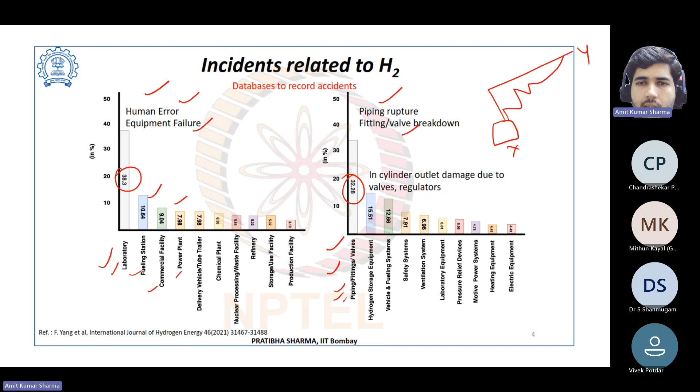Also, if we see the reason, maximum incidents are due to piping, fitting, and valves - either piping rupture, fitting failure, or valve breakdown. Almost 32% of incidents are due to this only, because hydrogen is a very light gas, and you have various kinds of valves, pipings, and fittings. Suppose your experimental setup is at location X and the storage is at location Y. From X to Y you have piping, and due to location and space constraints, this pipe may be zigzag type or have many connection fittings. So there are many points where leakage can happen - either valve breakdown, fitting breakdown, or piping rupture. Most incidents are due to this only.

Other reasons include hydrogen storage equipment and cylinder outlet damage due to valves and regulators - almost 12.66% in vehicles and fueling stations - then safety systems, ventilation systems, and so on. So these are the data regarding incidents related to hydrogen.

So there's an element of risk. The acceptable level of safety is represented by R equals P multiplied by C - probability multiplied by the consequences due to the incident, also the cost associated.

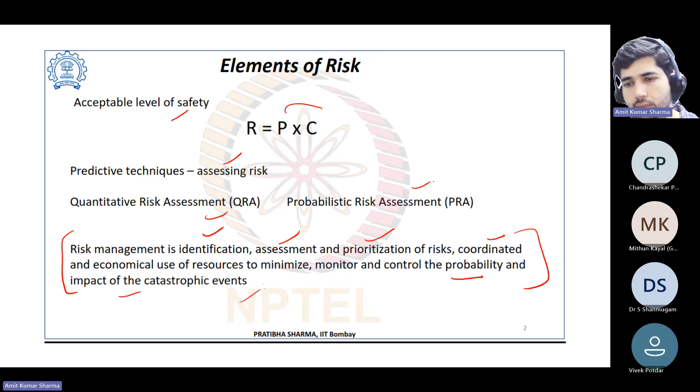So here we have predictive techniques. We can assess the risk using quantitative risk assessment (QRA) and probabilistic risk assessment (PRA). Risk management is the identification, assessment, and prioritization of risks, and the coordinated and economical use of resources to minimize, monitor, and control the probability and impact of catastrophic events. Because we are handling hydrogen, we need to consider all aspects of risk management - identification, assessment, prioritization of risk, and coordinated economical use of resources to minimize, monitor, and control the probability and impact of catastrophic events. These are the important elements for risk management.

In the past, there have been some incidents - the Hindenburg disaster. On 6 May 1937 in New Jersey, there was a fire with explosion, killing 36 people. The outer shell and paint of the airship was flammable and could have been ignited; electrical spark or electrostatic discharge was also a possible cause.

Due to this, the use of hydrogen was very limited. But later studies on this incident showed that maybe the fire was due to the outer shell and paint of the airship being flammable, not only due to hydrogen, but also due to electrostatic discharge. So there can be many reasons for the initial ignition that caused this incident.

Then the hydrogen vapor cloud explosion on 23 October 1989 at the Houston polyethylene plant. There was extensive damage, 22 lives lost and 100 injuries.

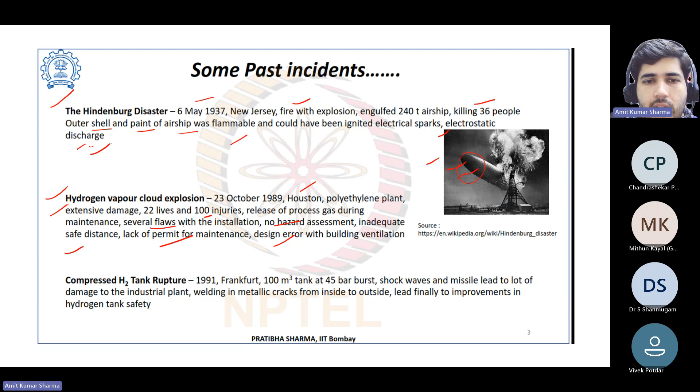In this release of process gas during maintenance, several flaws with the installation were recorded: no hazard assessment, inadequate safe distance, lack of permit for maintenance, and design error with building ventilation. So these were the reasons for this incident.

Then the compressed hydrogen tank rupture in 1991 in Frankfurt. An almost 100 cubic meter tank at 45 bar burst. Due to this, the shock wave and missile effects led to a lot of damage to the industrial plant, with welding and metallic cracks from inside to outside region, finally leading to improvements in hydrogen tank safety.

After this incident, there were major improvements in compressed hydrogen tanks. We have covered in our previous classes type 1, type 2, type 3, and type 4 kinds of tanks.

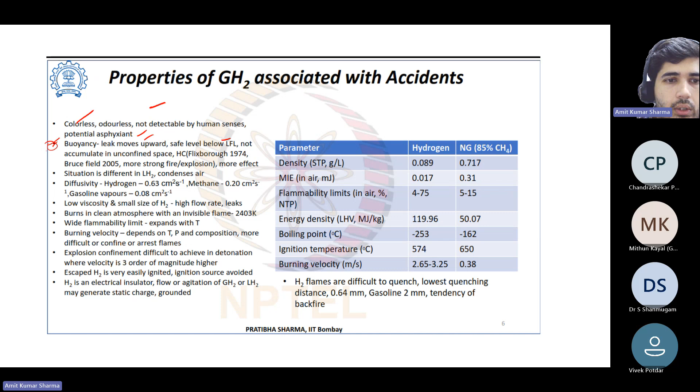As compared to hydrocarbons, hydrogen is more buoyant. In the Flixborough 1974 and Buncefield 2005 incidents, there were stronger fires and explosions due to hydrocarbons.

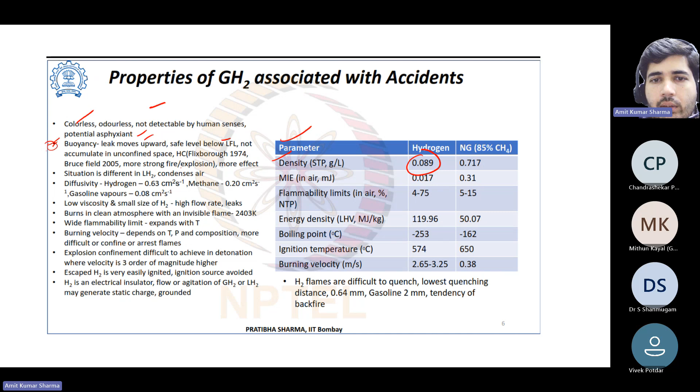If you compare the parameters, the density at STP for hydrogen is 0.089, for natural gas 0.717. The minimum ignition energy in air, in millijoules, is only 0.017 for hydrogen, compared to 0.31 for natural gas. So it's very low. The flammability limit is 4 to 75%.

If you are having liquid hydrogen, the situation is different because in that case the density is higher. The diffusivity of hydrogen is also very good, 0.63 centimeter square per second, as compared to methane at only 0.20. So it's also a good property.

If you are having hydrogen leakage, it will diffuse very fast, so in case of unconfined space, the chances of explosion are less. Low viscosity and small molecular size of hydrogen lead to high flow rate and leaks, and it burns in a clean atmosphere with an invisible flame.

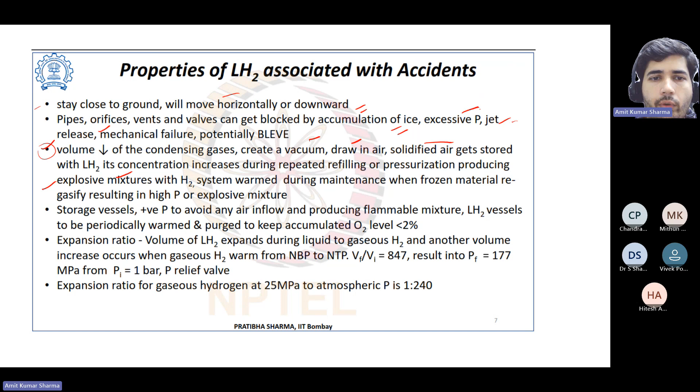To avoid this, the system must be warmed during maintenance when frozen material regasifies, resulting in high pressure or explosive mixture. The storage vessel should maintain positive pressure to avoid air inflow and producing flammable mixture. Liquid hydrogen vessels should be periodically warmed and purged to keep accumulated oxygen level less than 2%.

If we talk about the expansion ratio, since we are converting gaseous hydrogen into liquid hydrogen, there is a huge volume change. Volume of liquid hydrogen expands during liquid to gaseous transition, and another volume increase occurs when gaseous hydrogen warms from NBP to NTP. The final volume is 847 times the initial volume, and the final pressure is 177 megapascal. Due to this, there should always be a relief valve to release this high pressure. The expansion ratio of gaseous hydrogen at 25 megapascal to atmospheric pressure is 1 to 240.

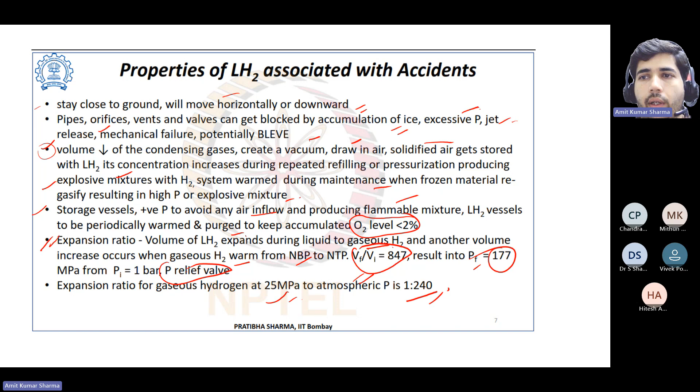Hydrogen embrittlement is also a measure - we covered this in our previous classes. It's a major issue; it can deteriorate the mechanical properties of metal, so selection of appropriate metal is an important part of hydrogen safety. The material chosen for the vessel and storage should have no embrittlement. The material should be metallurgically stable - phase change in the crystalline structure should not occur with time or repeated thermal cycling.

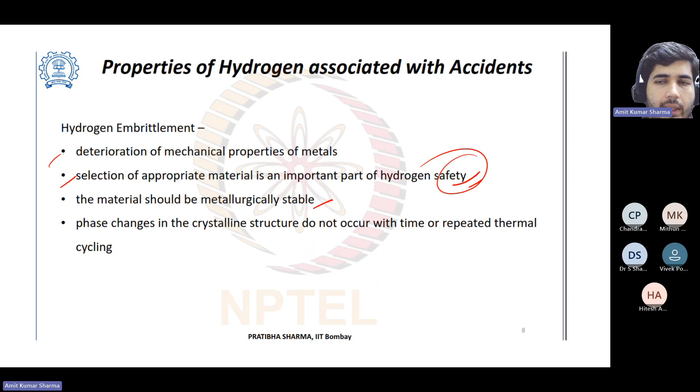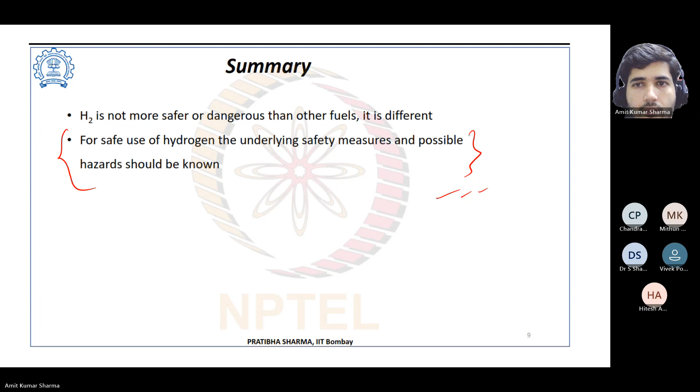Which among the following is a physiological hydrogen hazard: vapor cloud explosion, embrittlement, fire, or asphyxiation? The answer is asphyxiation, option D.

Types of hydrogen hazards are divided into three categories: physiological, physical and chemical. Physiological includes asphyxiation, overpressure, thermal burns and cryogenic burns. Physical includes embrittlement, environmental, internal and hydrogen reactions. Chemical includes rupture, explosion, fire, and vapor cloud explosion.

What is the meaning of asphyxiation? Asphyxiation is basically when hydrogen replaces oxygen, and when more than 95% of the oxygen is replaced, there is a problem of breathing - oxygen deficiency occurs. If you're in a confined space with no ventilation, hydrogen can displace the oxygen, and the concentration of oxygen will decrease, resulting in the case of asphyxiation.

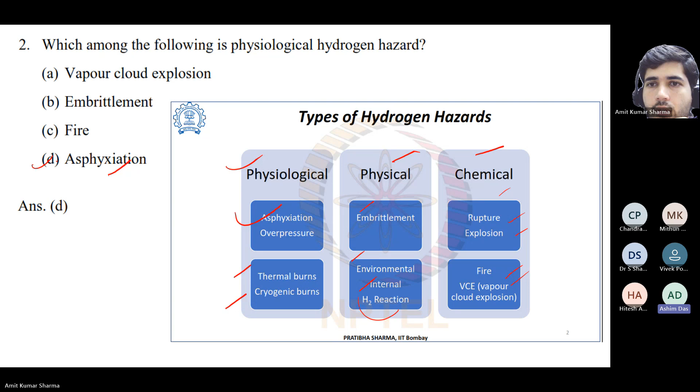There are some important terms. Explosion: if there is a rapid release of hydrogen and ignition occurs, there will be rapid release and pressure rise. Deflagration: flame front moves through a flammable mixture in the form of a subsonic wave with respect to the unburned mixture. Detonation: flame front coupled to a shock wave propagates through a detonable mixture in the form of a supersonic wave with respect to the unburned mixture - it propagates 1,000 times faster than deflagration. In BLEVE, there is sudden release of a large mass of pressurized liquid into the atmosphere; if flammable, it ignites forming a nearly spherical burning cloud or fireball. UVCE and CVCE are confined or unconfined vapor cloud explosions. Flash fire occurs with very dilute or very concentrated fuel mixture, but within flammability limits - flame travels in the cloud at low speed with very little pressure increase.

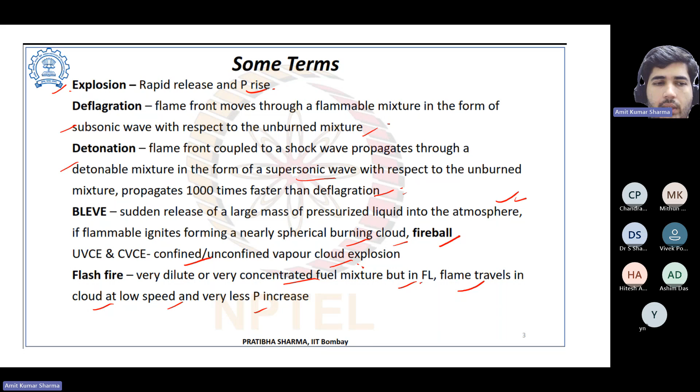These are some important definitions. Which among the following is not related to material properties causing hydrogen hazards: liner blistering, damage of carbon, fire, boiling liquid expanding vapor explosion (BLEVE), or embrittlement?

It's damage of carbon fiber, option B. I think it will be fiber, na? Instead of fire. Yes, fiber. Damage of carbon fiber.

So anybody else? We have one answer. It is boiling liquid expansion and vapor explosion. Okay, we have another answer, a different one.

So let's once again go through the question. The question is about which among the following is not related to the material properties causing hydrogen hazards. So it should be not connected with the material.

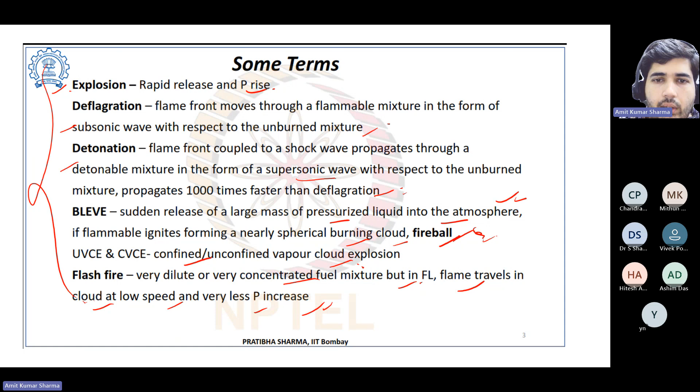Embrittlement, we know, is a metal property, then also the blistering and also the damage of carbon fiber. So correct answer is option C.

So if you go through the cause of hazards, then it's due to material properties related or handling system related. Under material properties related, here comes liner blistering in the pressure vessel, hydrogen permeation, embrittlement, damage to carbon fibers, resistance to fire and high temperature, and property changes at lower temperature. So these things come under material properties.

And if you see the handling aspect, then BLEVE, boiling liquid expanding vapor explosion, then gas hydrogen leakage, liquid hydrogen release, hydrogen jet fire, temperature variation, thermal radiation, delayed ignition, and explosion. So these are the two major causes of hazard connected with the handling system or material properties related system.

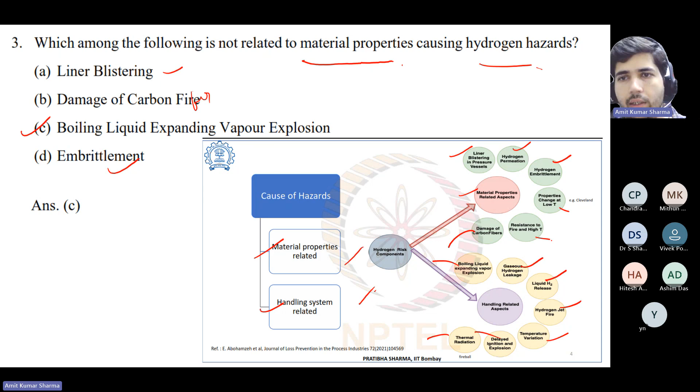If you see gaseous hydrogen hazards, then the release is connected with immediate ignition, delayed ignition, or rupture of vessel. So release can be due to three reasons: immediate ignition, delayed ignition, or after release there can be rupture of vessel. These happen if there is a hydrogen air flammable mixture and an ignition source.

So, factors to assess the appropriate consequences: the characteristics of release like pressure - when there is a release, what is the pressure, low or high; then the size, buoyancy driven or not; then the space, confined or unconfined; then the source, any potential ignition source present or not; then the ignition, immediate or delayed; then external aggression - not release, but external aggression like thermal, mechanical, or storage vessel rupture or burst. These are the factors you need to assess appropriately.

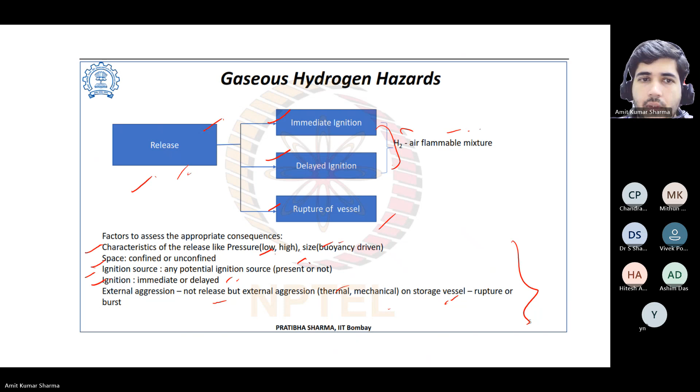Anybody? Jet fire means there is a continuous small jet fire, and flash fire means once fire is done, then it got extinguished.

Okay, anybody else? Jet fire means suddenly pressurized gas will release, and if there is any fire, due to high pressure and density, all of the gas will not catch fire, so it will propagate along with the fire - that is jet fire. Flash fire is when a vapor makes a gaseous mixture with sufficient oxygen, high volume, and there is fire - that is flash fire.

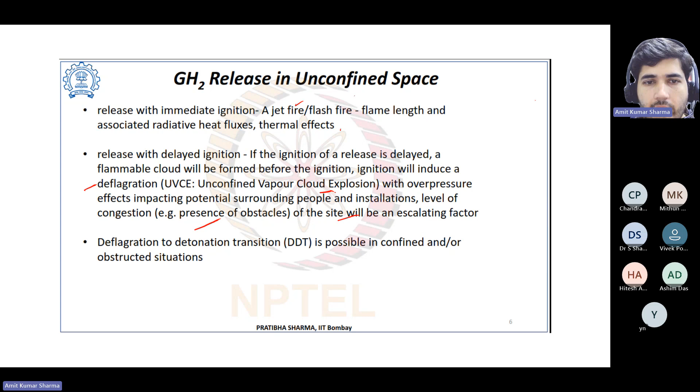Level of congestion, like the presence of obstacles on the site, will be an escalating factor. Deflagration to detonation transition is possible in confined and/or obstructed situations.

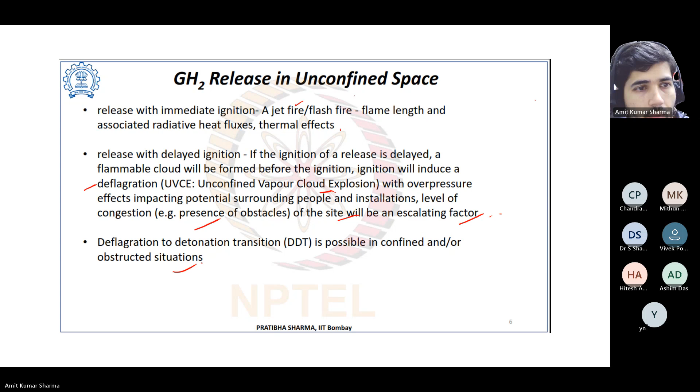If we have a confined space and there is a release of gaseous hydrogen, a confined space can be more concerning, or a container hosting a process, hydrogen storage, garages, parking, tunnels, accumulation.

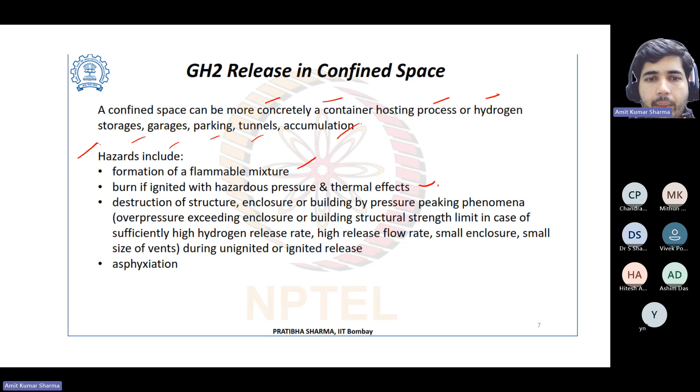The hazards that can be included are formation of a flammable mixture, burn if ignited with hazardous pressure, and thermal effects. Also destruction of structure, enclosure, or building by pressure peaking phenomena, or pressure exceeding the enclosure or building structure strength.

This occurs in case of sufficiently high hydrogen release rate, high release flow rate, small enclosure, small size of vents, during unignited or ignited release.

And asphyxiation due to the displacement of oxygen. Then the hydrogen buildup: hydrogen release in a confined space will accumulate according to ventilation rate, and concentration level and distribution will differ.

It depends on the ventilation. If there is no ventilation, hydrogen concentration will depend on the release duration. A long duration release can reach up to 100%. Natural ventilation is driven by the buoyancy effect.

This is a way of mitigating hydrogen buildup in case of accidental release in confined spaces. Mechanical ventilation is driven by fans or other mechanical devices, limiting hydrogen concentration inside a confined space, used when natural ventilation is not possible or not sufficient to reach safety targets.

Venting panels can be set up on the roof of the container. Flames are directed upwards, aerial overpressure at ground level is very limited, and container deformation is limited. Efficient mitigation means limiting the effect of an explosion in a confined space, so these are the things we can do.

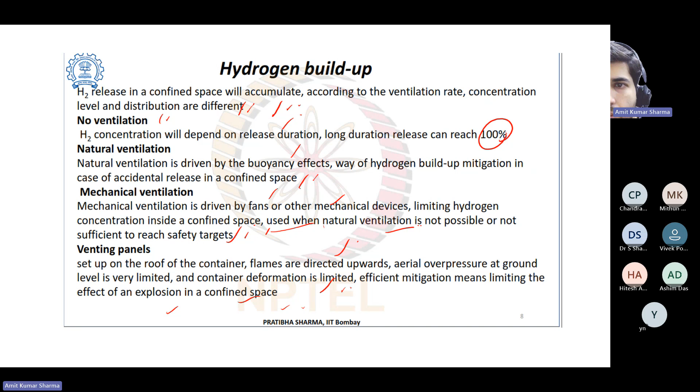If there is a burst of a pressurized vessel, it is a physical explosion with rapid expansion, generating an overpressure wave in addition to fragments. It can occur at normal operating pressure, working pressure, due to degradation over time of the pressurized volume: corrosion, fatigue, embrittlement. These are the reasons for this.

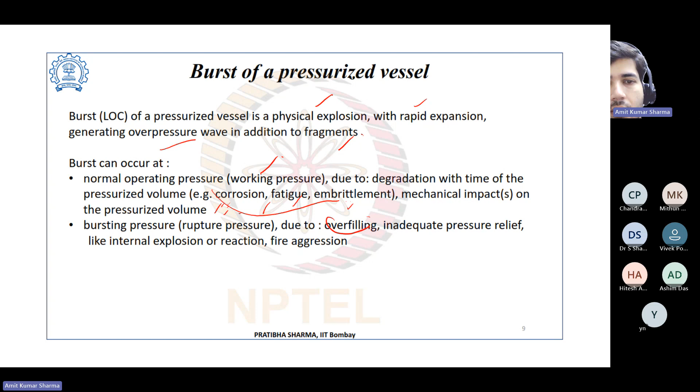Also the mechanical impact on the pressurized volume, and bursting pressure due to overfilling beyond the limit. Then inadequate pressure relief, if there is no pressure relief, can lead to internal explosion or reaction and fire aggression.

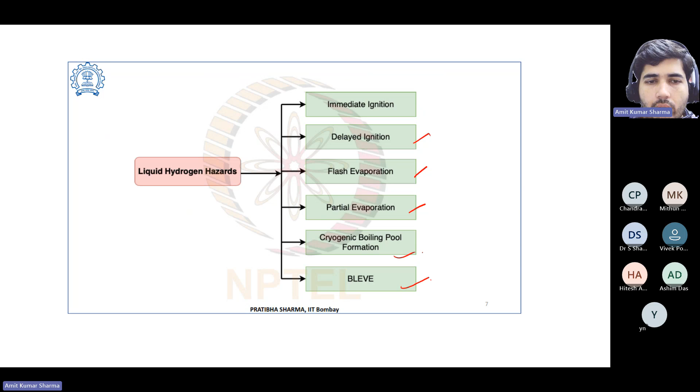Liquid hydrogen hazards are immediate ignition, delayed ignition, flash evaporation, partial evaporation, BLEVE, and cryogenic boiling pool formation. Immediate ignition results in a high pressure jet or overpressure effect due to ignition. Delayed ignition: flow horizontally or downwards after immediate release of liquid hydrogen, condensation of atmospheric humidity making it visible and more dense.

Because its temperature is very low, atmospheric humidity will condense, giving a high expansion ratio larger than the cloud induced by gaseous hydrogen release. We have seen that the expansion ratio is very high, almost 800 times.

Intensity and distance of effect depend on the pressure or release diameter; there can be a jet, a rainout phenomenon, formation of hydrogen droplets falling on the ground and inducing a hydrogen pool can be observed.

The cryogenic hydrogen pool vaporization: a hydrogen liquid spillage can induce a pool. Liquid hydrogen will vaporize and form a flammable cloud with significant volume, and wind conditions have a significant impact on the propagation and dispersion of the cloud.

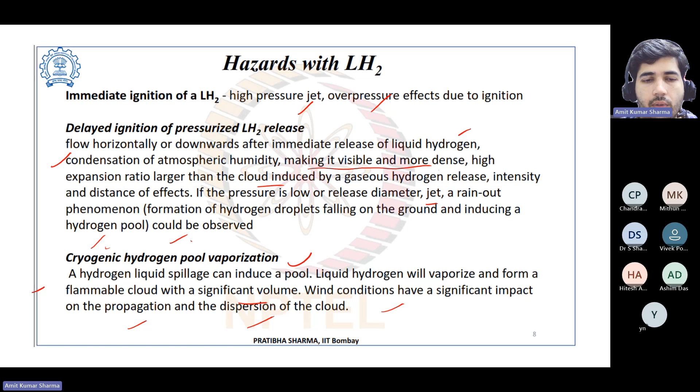And the UVCE: a cold reactive hydrogen-air cloud formed, ignited, and the flame could interact with obstacles, vaporizer, pipe break, vegetation, possibly leading to flame acceleration and even to a deflagration to detonation transition in the worst case scenario.

About BLEVE: liquid which is stored at temperature above its saturation temperature at atmospheric pressure, some of the liquid will flash to vapor, resulting in the generation of overpressure. Ignition of the released contents produces a large fireball, which can determine the hazard range, so there will be a large fireball at the source - that is a BLEVE.

Normally liquid hydrogen vessels have pressure relief valves. Failure or blockage of the system could lead to a BLEVE, or fire attack could raise pressure and lead to a BLEVE with fireball due to inadequate venting of pressure. It's very important to have a pressure relief valve.

Which phenomena among the following will occur on immediate ignition of gaseous hydrogen released in unconfined space? Unconfined vapor cloud explosion, BLEVE, jet fire, or cryogenic pool formation.

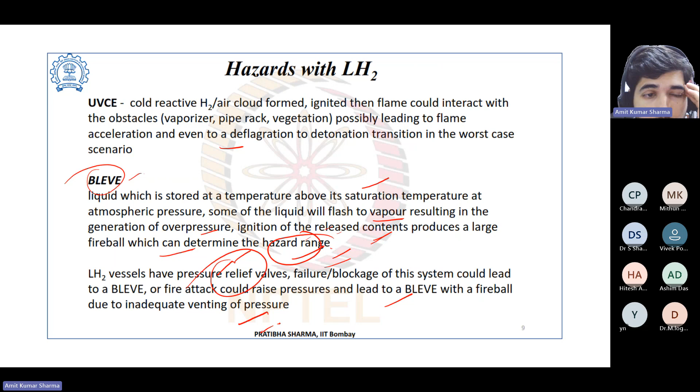Which among the following is an advanced quantitative risk assessment model? Event tree, discrete dynamic event tree, fault tree, parts count. So which among these is the advanced quantitative risk assessment model? Dynamic event tree. So we have one answer, option B, discrete dynamic event tree.

So correct answer is option B, discrete dynamic event tree. So event tree, fault tree and parts count are conventional, or you can say the old quantitative risk assessment models, and the advanced one is the discrete dynamic event tree.

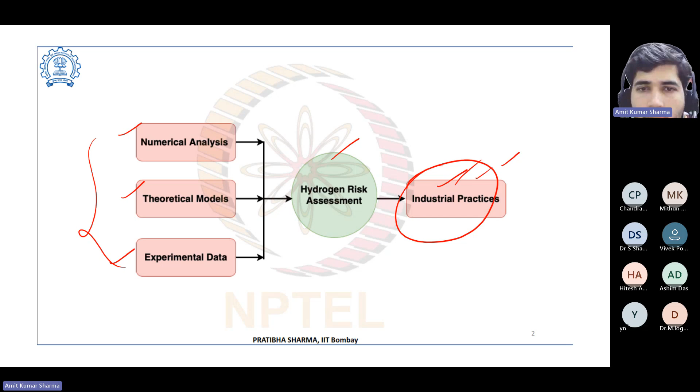So for hydrogen risk assessment, we can have numerical analysis, theoretical models, and experimental data. Based on these, we can do the hydrogen risk assessment, and we can also follow industrial practices. So it's good because we know that industries are using hydrogen for a long time, so these practices are very important.

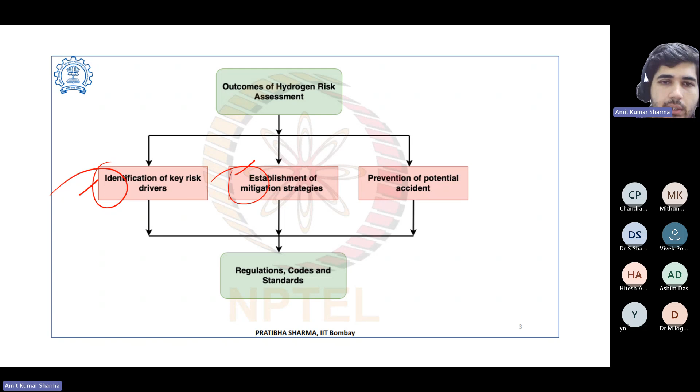So the outcomes of hydrogen risk assessment are identification of key risk drivers. So what are the points, factors, parameters that are the drivers for the risk. And the establishment of mitigation strategy, you need to come up with a strategy to mitigate the risk, and the prevention of potential accident. So these three points you need to consider under hydrogen risk assessment.

By combining these three, we come up with regulation, codes, and standards. Based on these three, we have some regulations, codes, and standards that we have to follow so that we can avoid any accident.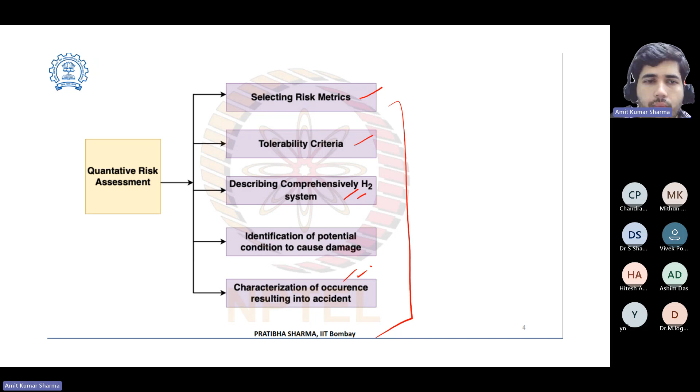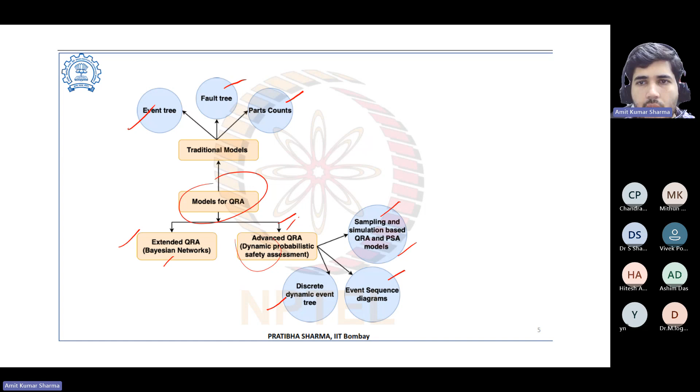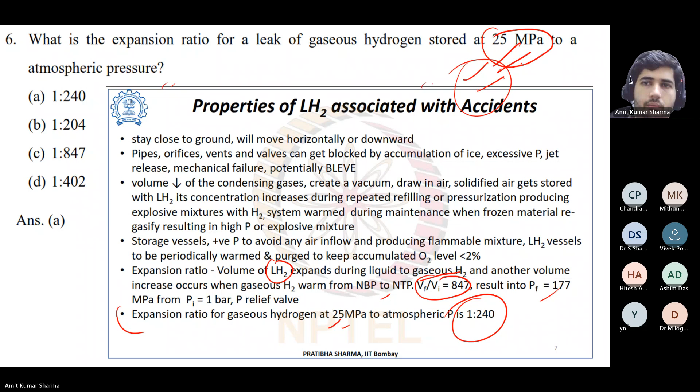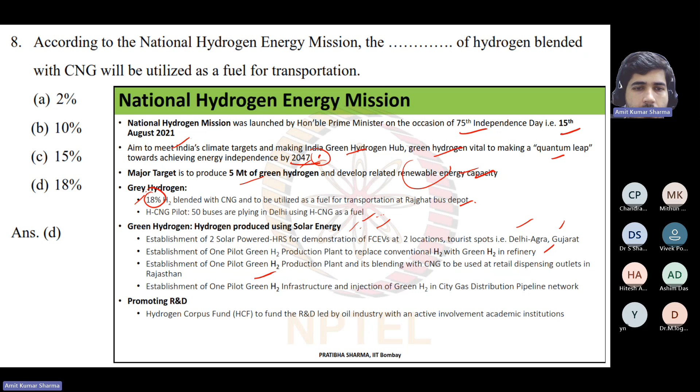Then establishment of one pilot green hydrogen infrastructure and injection of green hydrogen in city gas distribution pipeline network. Then promoting R&D - Hydrogen Corpus Fund (HCF) to fund the R&D led by oil industry with active involvement of academic institutions. So now we have National Green Hydrogen Mission. First it was National Hydrogen Energy Mission, so under this now we have NGHM.

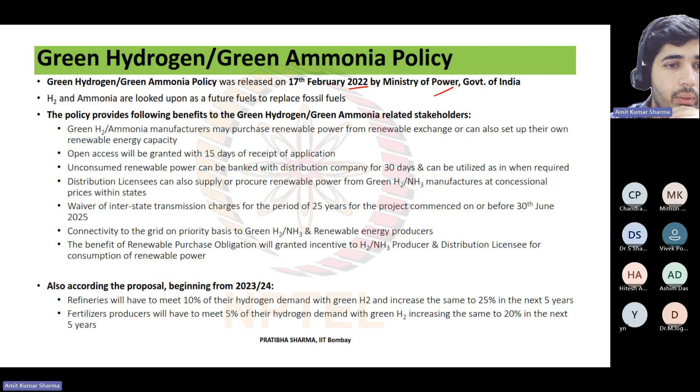There's a green hydrogen, green ammonia policy released on 17th February 2022 by Ministry of Power, Government of India. So hydrogen and ammonia are looked upon as future fuels to replace fossil fuel. The policy provides benefits to green hydrogen, green ammonia related stakeholders. First, the green hydrogen ammonia manufacturers may purchase renewable power from renewable exchange or can also set up their own renewable energy capacity. So where do we use ammonia?

Fertilizer, yeah, in fertilizer. Then methanol generation, yeah. So what is green ammonia? Where the source of hydrogen would be from renewables. Yes, using the hydrogen - fossil is used for ammonia generation normally, but if we use green hydrogen and make ammonia, then that's green ammonia.

So open access will be granted within 15 days of receipt of the application. Then the unconsumed renewable power can be banked with distribution company for 30 days. So there are some details about the policies.

Also according to the proposal, beginning from 2023 and 2024, refineries will have to meet 10% of their hydrogen demand with green hydrogen and increase the same to 25% in the next 5 years. Then the fertilizer producer will have to meet 5% of their hydrogen demand with green hydrogen, increasing the same to 20% in the next 5 years. So these are the targets.

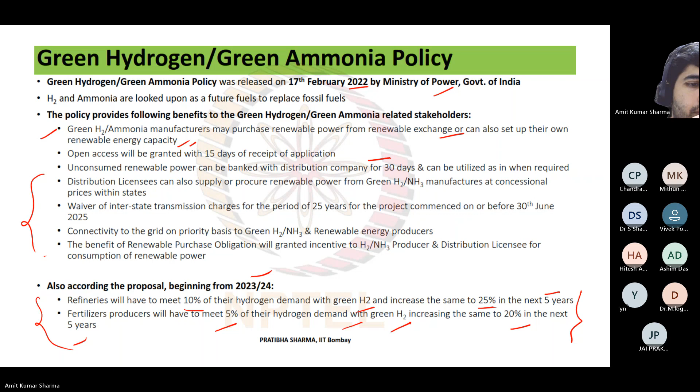So how much percentage of refineries' present hydrogen demand is supposed to be met with green hydrogen as per the green hydrogen, green ammonia policy of Government of India? It's 10%. Yes, so we have covered here - they have to meet 10% of their hydrogen demand with green hydrogen. So the answer is A, 10%.

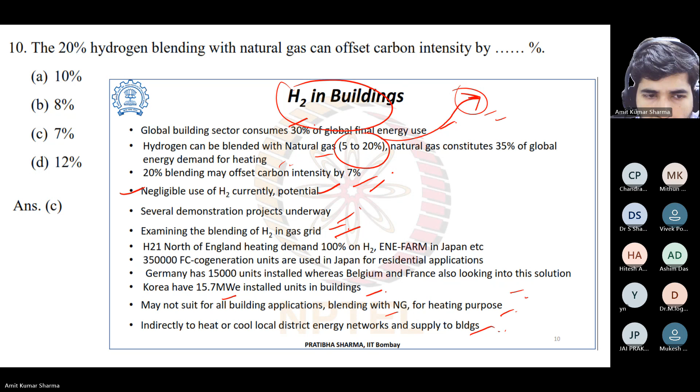Korea has 15.7 megawatts of electric installed in buildings, so there's a huge potential for hydrogen. It may not suit all building applications, but blending with natural gas for heating purposes is possible, indirectly heating or cooling local district energy networks and supplying buildings. So hydrogen has a huge market in buildings for heating, electricity, and so on.

The following properties of hydrogen are assets when safety of hydrogen is concerned: high diffusivity, low ignition energy, wide flammability limit, high flame speed.

Which of these properties is considered an asset? High diffusivity. Yes, the diffusion rate is very high, so if there is a leakage it will diffuse very fast. If the space is unconfined, there is no issue with that. So high diffusivity is an asset, while low ignition energy, wide flammability limit, and high flame speed are risk factors.

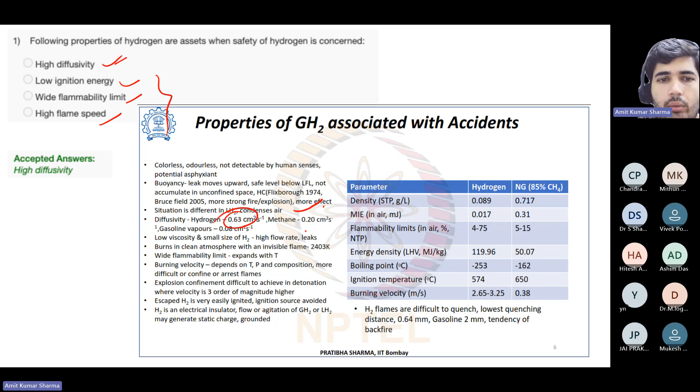So we have covered this: diffusivity is 0.63 square centimeters per second for hydrogen, 0.20 for methane, and 0.08 for gasoline.

Expansion ratio when liquid hydrogen leaks, spills at NBP, and evaporates to gaseous hydrogen at NTP is 847. So we have covered that from NBP to NTP it's 847. NBP is normal boiling point, and NTP is normal temperature and pressure.

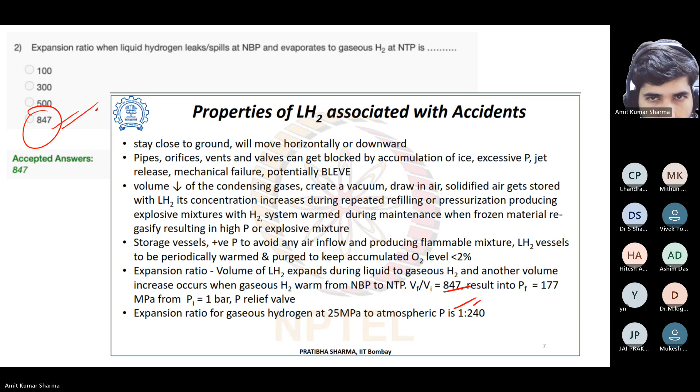Which of the following is not a hydrogen-related hazard: physiological, physical, chemical, hydrogen released in unconfined space and absence of ignition source? Option D. Yes, because chemical, physical, and physiological hazards exist, but if there is a release of hydrogen in an unconfined space with absence of ignition source, due to diffusivity and buoyancy, it is not a hazard.

Among the following, which is a material-related hazard: hydrogen embrittlement, BLEVE, flash fire, fireball? The first one, embrittlement. Yes, as we covered in previous weeks' videos, embrittlement is the material-related hazard.

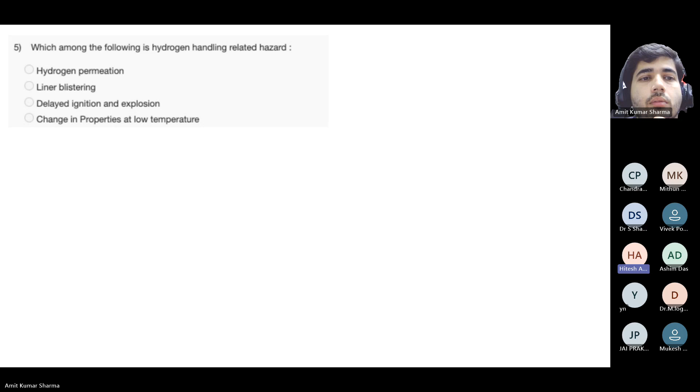Which among the following is a hydrogen handling-related hazard: hydrogen permeation, liner blistering, delayed ignition and explosion, or change in properties at low temperature? It's liner blistering because in the storage tank... the question is about handling related, so it's important to remember we've covered material-related and handling-related hazards in today's class.

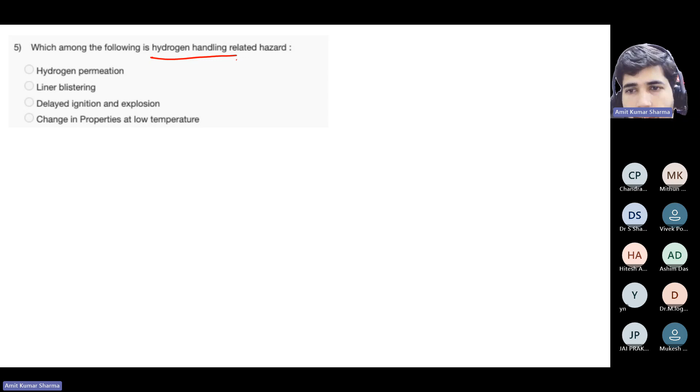If you consider permeation, it is through the material, so it's not regarding handling. Liner blistering is also a material hazard. I think delayed ignition and explosion is the handling hazard. Yes, delayed ignition and explosion is the handling hazard, because change in properties at low temperature is also material-related. So the correct answer is option C, delayed ignition and explosion.

The main reason for the failure of hydrogen equipment is: piping, fitting, valves rupture; electric equipment failure; safety system failure; or operating temperature? The first one.

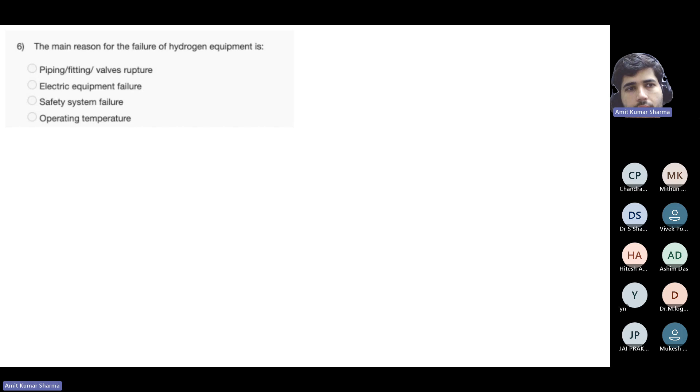The piping, fittings, and valve structure are all reasons for failure. Operating temperature could be a factor too, but what is the main reason? Let's try to remember the initial slide where we covered the main reasons for equipment failure. One reason has 30% weightage, another 15%, another 10%, and so on. So what is the main reason for equipment failure? It will be the safety system failure.

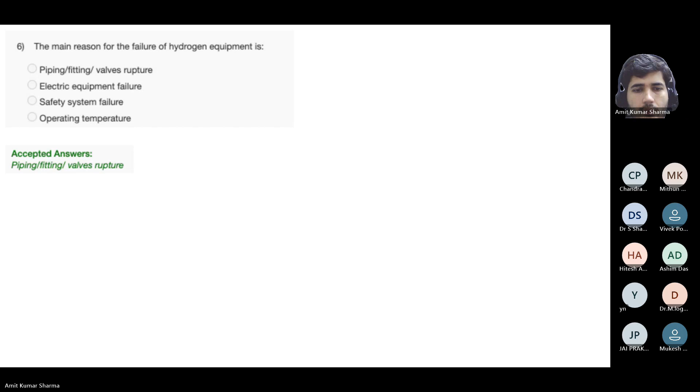The correct answer is option A: piping, fitting, and valve structure are the main reason for failure of hydrogen equipment. If you see the data, it's almost 32.38% due to piping rupture, fitting, and valve breakdown. Storage equipment failure is 15%. If you consider safety system failure, it's only 7.9%. So the major equipment failure is due to piping rupture, fitting, and valve breakdown.

Next question: the primary reason for the physical type hydrogen hazard is high temperature, low pressure, embrittlement, or flash evaporation? Embrittlement. Yes, so the correct answer is embrittlement. The physical type hydrogen hazard is embrittlement.

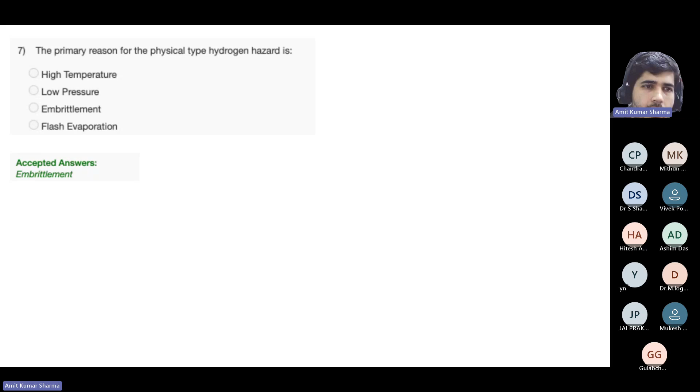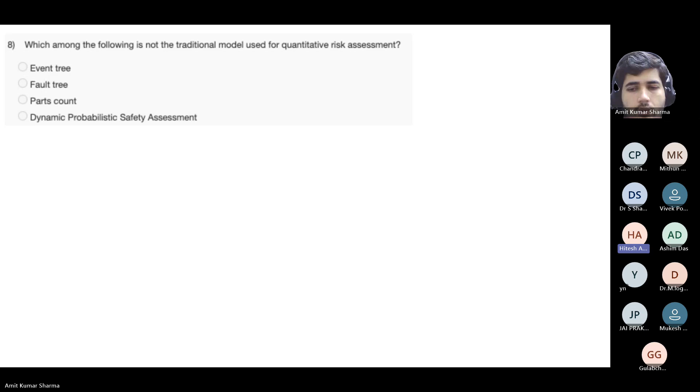Which among the following is not the traditional model used for quantitative risk assessment: event tree, fault tree, parts count, or dynamic probabilistic safety assessment? We have covered option D already, dynamic probabilistic safety assessment, last time. So these three are the traditional ones, and this is the other one.

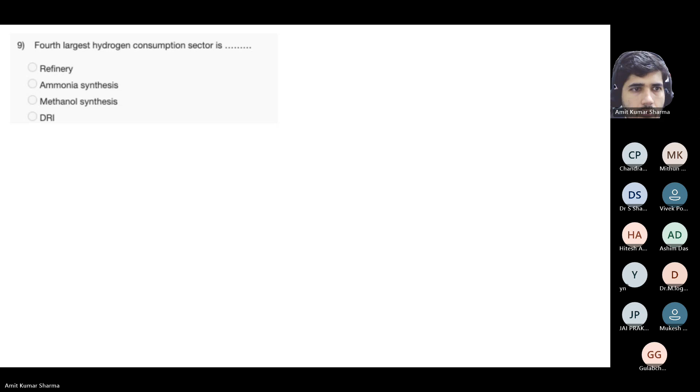The fourth largest hydrogen consumption sector is refinery, ammonia synthesis, methanol synthesis, or DRI? DRI. What is the full form of DRI? Direct reduction of iron. Yes, nice. So the answer is DRI.

If we see the use of hydrogen, for power to fuel we can have synthetic fuels and ammonia. For heating purpose, industrial and residential. For transport, road, train, aviation, and shipping. For power sector, large scale energy storage, power generation, and off-grid power supply. Also for space application. For industrial use, we have refining, ammonia, methanol, and DRI.

If we see hydrogen use in refineries, there is 33% demand in refineries, about 40 million metric tons of hydrogen in 2020. 50% is met by catalytic naphtha reforming and steam crackers, and the remaining is met by either on-site production or externally sourced from merchants. Demand will increase due to growing refining activity and rising treatment requirements till 2030.

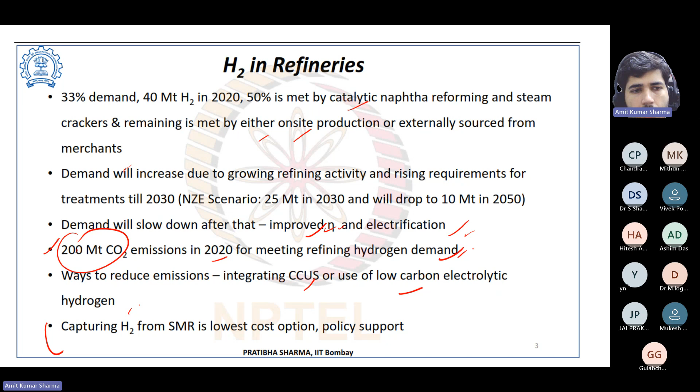Ways to reduce emission include integrating carbon capture utilization and storage units (CCUS), or using low carbon electrolytic hydrogen. Capturing hydrogen from SMR is the lowest cost option with policy support. So how much CO2 is emitted from the SMR process for 1 kg of hydrogen?

Try to remember our previous classes. Almost 9 kg of CO2 per kg of H2, if you are using natural gas as fuel for the SMR process.

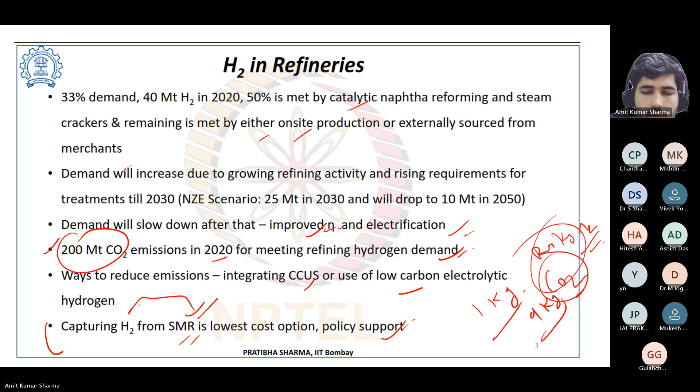So what is hydrogen? Do we have any direct source of hydrogen in our systems? Do we have any source of direct hydrogen on Earth? No. We are having fossil fuels like oil, which we get from the earth. We have natural gas, which we can have directly. But do we have any source of direct hydrogen available on earth? No.

Hydrogen has also been discovered in certain oil wells, which are gaseous, and there are also underground hydrogen sort of reservoirs rather than natural gas. But that is also due to some reactions only, the science behind that is due to some reactions. So basically, hydrogen is an energy carrier, it is not available in the direct form.

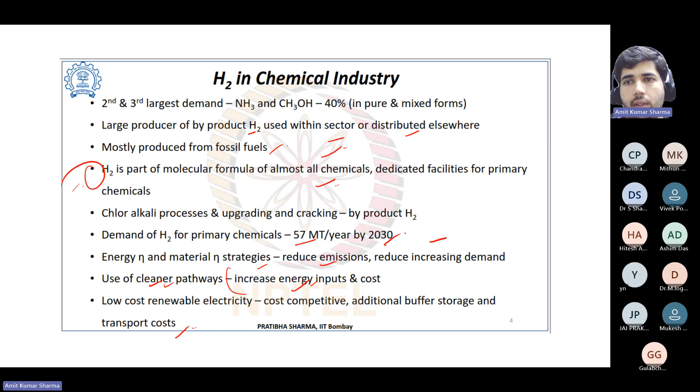The demand of hydrogen for primary chemicals is 57 million metric tons per year by 2030. Energy efficiency and material efficiency strategies can reduce emission and increasing demand, and use of cleaner pathways increases energy input and cost. Because if you are having the cleaner pathway, then it will increase the cost and input. Low cost renewable electricity is a requirement, so cost competitive additional buffer storage and transport cost is also an important factor.

Now iron and steel production is the fourth largest demand. DRI, the producer of large quantities of hydrogen in mixed gas form, coke oven gas, all require hydrogen from fossil fuels. To reduce emission, use of hydrogen as a key reducing agent by 2030, blending into existing process. So in the steel sector also we are using hydrogen, and now in that sector green hydrogen is being promoted.

Sir, for DRI furnaces there is a new approach wherein bio CBG can be injected directly into the DRI furnaces. It will give you carbon black as a residue and release hydrogen in pure form. Basically you are doing pyrolysis, catalytic pyrolysis or reforming of methane. So you are doing methane cracking, using some catalyst, and methane cracking.

When you inject it in the DRI furnace, at that temperature it decomposes the methane, but the source is biogas, rather compressed biogas, enriched one - CBG. CBG can be considered like methane only, because as per the standard of CBG, the methane content should be more than 90%. Normally in CBG we have almost 94 to 95% methane and 3 to 4% CO2.

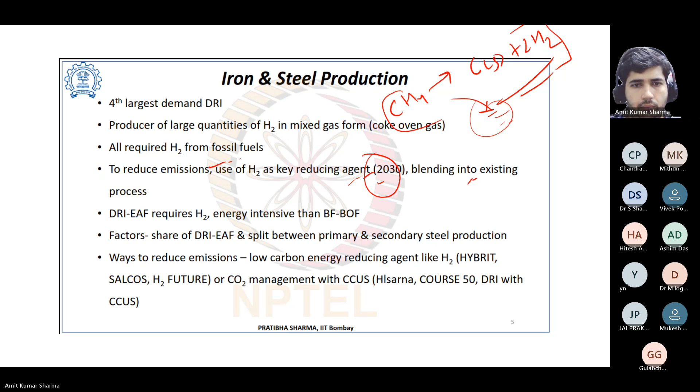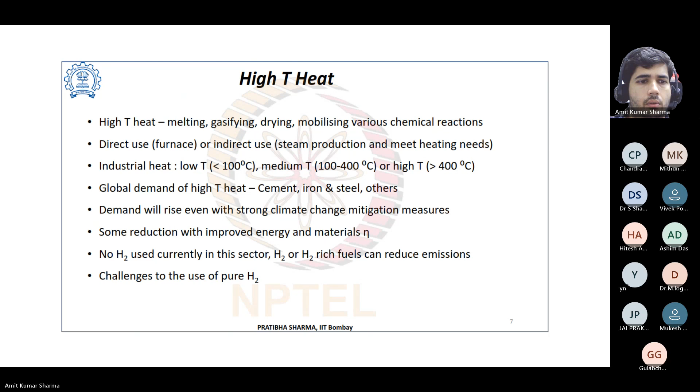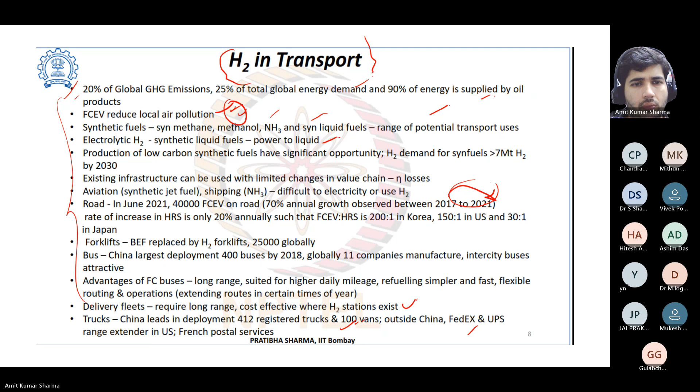In rails, two Alstom trains completed greater than 180,000 kilometer travel distance. Germany and Austria have started regular passenger service in 2020. UK and Netherlands are doing pilot runs for fuel cell rail, while France, Italy, and UK have placed orders for trains.

In shipping, green ammonia is looked upon as a 100% potential alternative to power ships by 2023. In aviation, Airbus is exploring a hydrogen-powered aircraft concept with potential of carrying 200 passengers up to a distance of 3,700 kilometers by 2035.

As per the announced pledge scenario, hydrogen demand in the transport sector is 520 petajoules and is projected to rise 15 times by 2050.

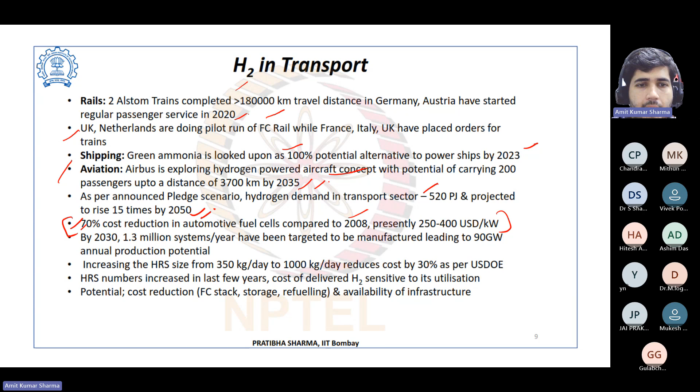There's been a 70% cost reduction in automotive fuel cells compared to 2008. As we move forward with larger high production rates, new discoveries, and R&D, the cost of fuel cells is reducing. By 2030, 1.3 million systems per year have been targeted to be manufactured, leading to 90 gigawatt annual production potential.

So the potential lies in cost reduction of the fuel cell stack, storage, refueling, and availability of infrastructure. We need to reduce the stack cost. Storage cost is also high, and so is refueling cost.

So building applications we have covered. It can be used for heating and electricity.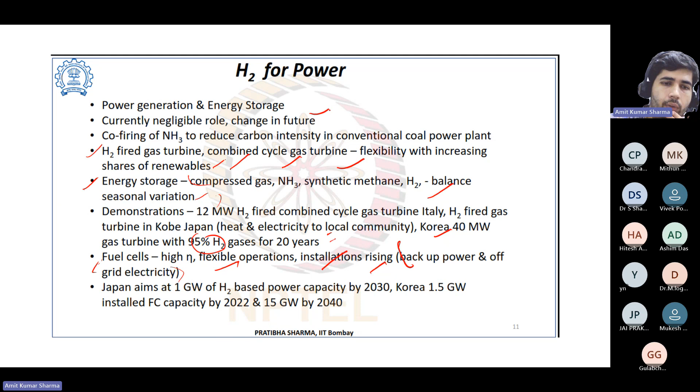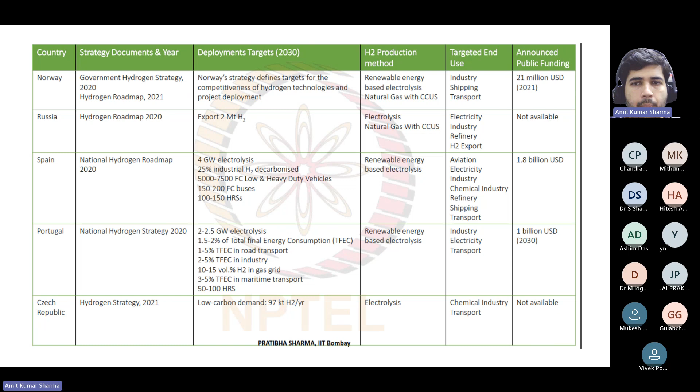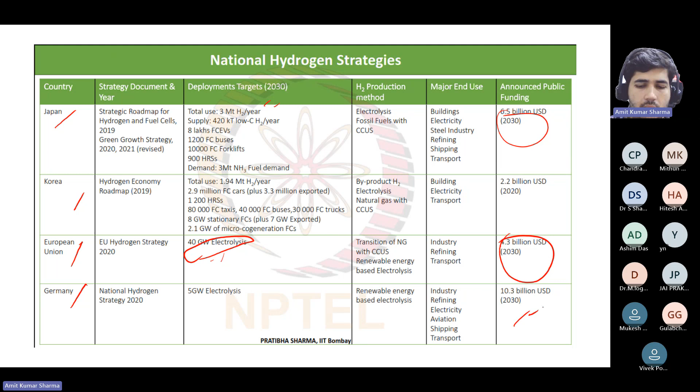Other countries with their own national hydrogen strategies include Canada, France, Netherlands, UK, Norway, Russia, Spain, Portugal, Czech Republic, Hungary, and Chile. They are all working hard towards green hydrogen.

Now, what are the major barriers? Cost is a major barrier. The cost for green hydrogen is still high relative to high carbon fuels. The cost of production, transporting, converting, and storing hydrogen is also high.

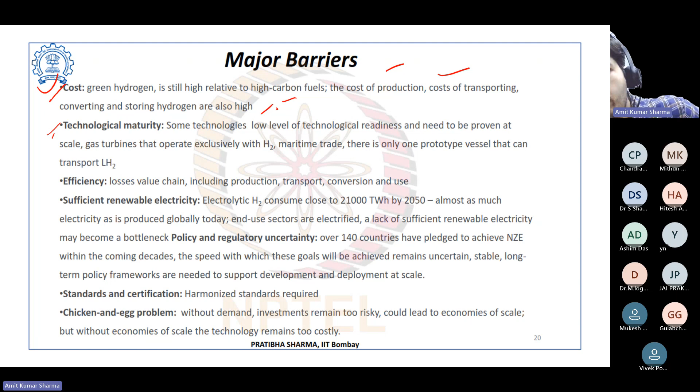Technological maturity is also a barrier, because some technologies have a low level of technology readiness and need to be proven at larger scale. For example, gas turbines that operate exclusively with hydrogen, and in maritime trade there's only one prototype vessel that can transport liquid hydrogen.

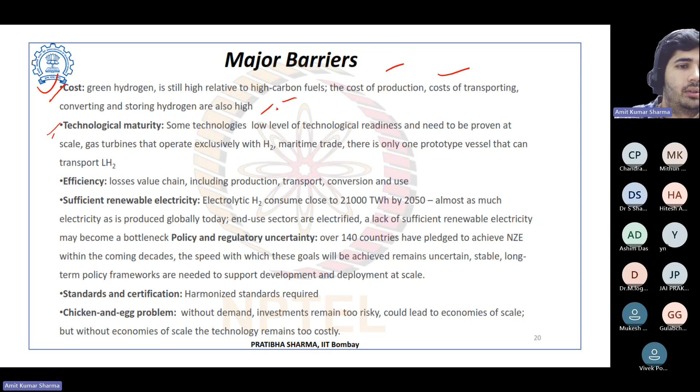Efficiency is another barrier, as there are losses across the value chain, including production, transport, conversion, and use. We need to consider the efficiency of each part before the overall efficiency can be considered.

The need for sufficient renewable electricity is also a concern. Electrolytic hydrogen could consume close to 21,000 TWh by 2050, almost as much electricity as is produced globally today, as end use sectors become electrified. A lack of sufficient renewable electricity may become a bottleneck.

There is also policy and regulatory uncertainty. As of now, over 140 countries have pledged to achieve net zero emissions within the coming decades, but the speed with which these goals will be achieved remains uncertain. Stable long-term policy frameworks are needed to support development and deployment at scale, and it's still unclear how these countries will achieve their pledges, as policies are still under development.

Now, standards and certification. Since hydrogen is being discussed all over the world, there should be harmonized standards required, so it can be transported anywhere in the world.

This creates a chicken and egg problem: without demand, investment remains too risky to reach economies of scale, but without economies of scale, the technology remains too costly.

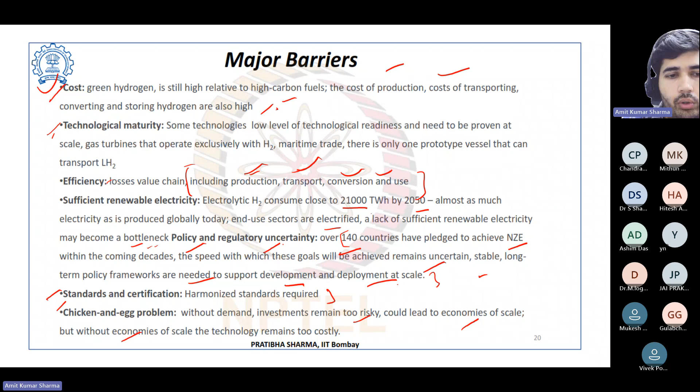So, there are some key points. Renewables together with energy efficiency will be responsible for energy transition. So we need to have renewables, but with energy efficiency. Then only we can have a good energy transition.

Hydrogen will play a key role towards climate change mitigation strategies. 12% of final energy consumption by 2050 will be by green hydrogen. H2 will allow transport of renewable energy over long distance, promoting energy trade. So basically we can transport the hydrogen in the form of methanol, green ammonia, liquid hydrogen and all.

In upcoming years in Europe, Netherlands is about to become the major hydrogen importer and exporter for Europe. Netherlands will try to import hydrogen from various other parts of the globe, and that will become a gateway to Europe, because Netherlands has very connecting pipelines all over Europe. So they have a full grid of pipelines connecting major parts of Europe.

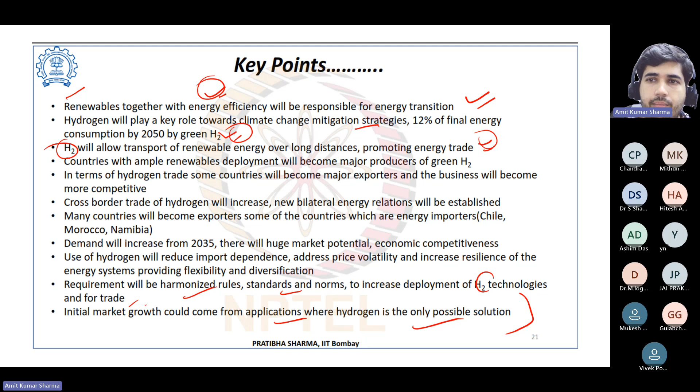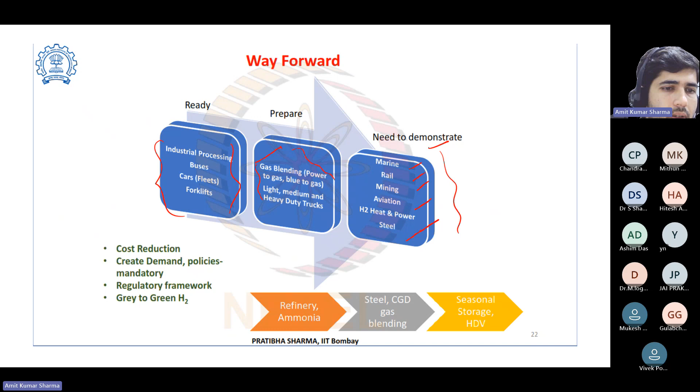So chemical refinery remains the major consumer. Transport, building, power sector all have potential to use H2 if cost of production and utilization decreases. It's an important thing - cost is a very important part for the wide scale adoption of hydrogen.

The advantage of using hydrogen as an energy carrier includes reduction in energy import, increased carbon footprint, decreased resilience of energy systems, cannot be produced from renewables.

So it is reduction in energy import - that's the first one, yes, because every country is spending a lot of currency on energy import. So the advantage of using hydrogen as an energy carrier can reduce the energy import. It's a cleaner fuel, so it will not increase the carbon footprint - so that's wrong. It can be produced from renewables, so that statement is wrong. Decrease the resilience of the energy system - wrong, it increases.

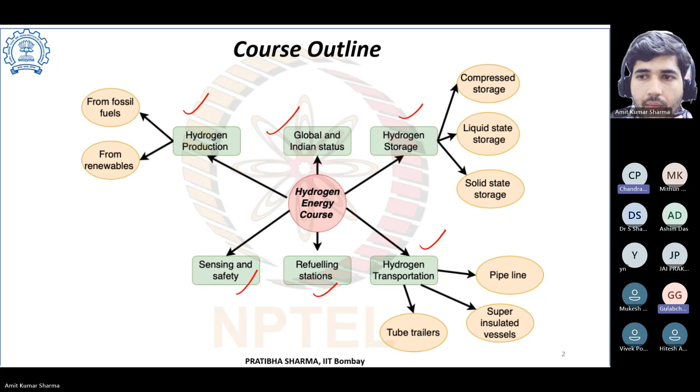Even we would like to join. Somehow if we can get it, we would also like to join that. Thanks for that, sure.

Thank you, Mr. Gulabchand, for sharing your experience. I hope this course knowledge will help you work more on water treatment projects, and maybe you can also explore the green hydrogen way.

Thank you, so anybody else? Can you just repeat his name, Gulab Chand? It's Mr. Gulabchand Gupta. Okay, I'm trying to ping you on LinkedIn.